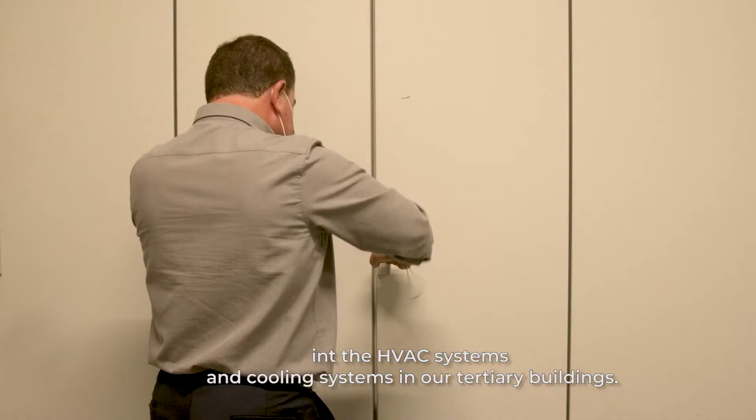One of the use cases regards the provision of flexibility to the grid operator, taking advantage of the existing flexibility in the HVAC and cooling systems in our tertiary buildings. We'll also test innovative EV charging strategies as part of our convenience services, responding to the needs of our clients in terms of electric mobility.

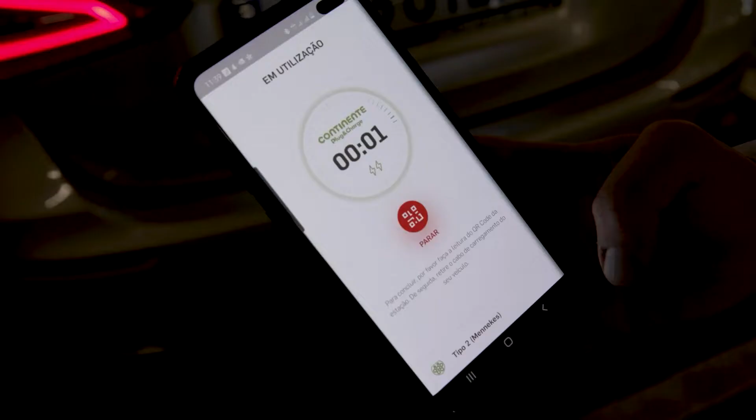We will also enhance the integration of PV solutions, making sure that our stores are increasingly more positive. Projects like InterConnect are essential to break some of the existing technological barriers and demonstrate the solutions and its potential.

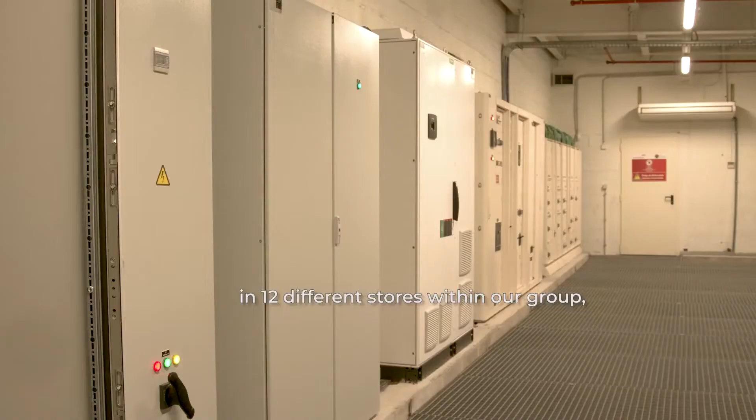Sonae MC, as end user, will test and validate the technologies being developed in 12 different stores within our group, where we are deploying them to support our commercial pilots. Based on the results, Sonae MC could replicate these to other Sonae stores or even to other business units within our group to leverage and consolidate our sustainability corporate strategy as well as the decarbonization of the energy sector.

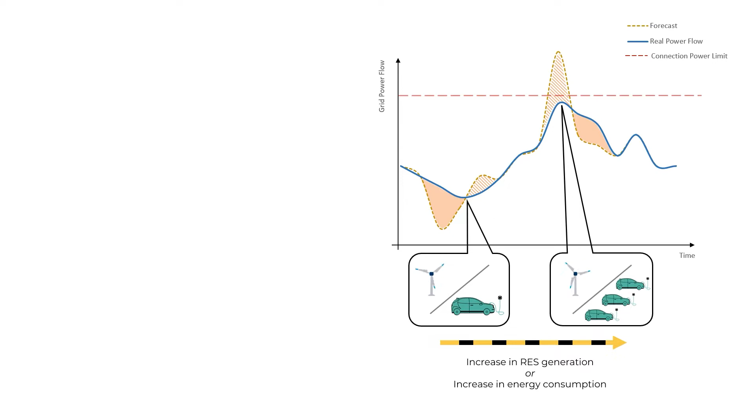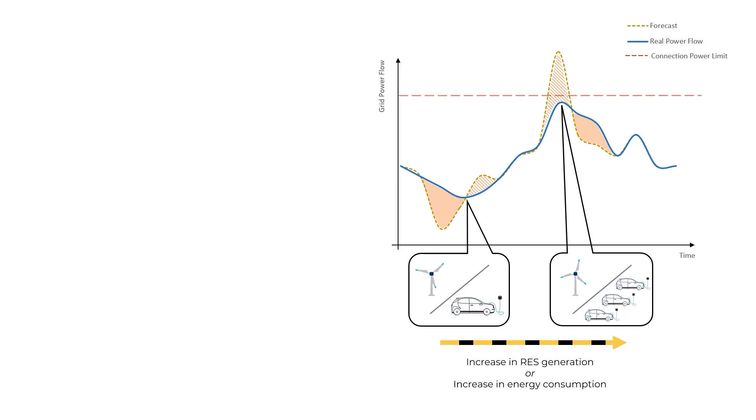The continuous adoption of load-intensive distributed resources such as electrical vehicles or heat pumps, and renewable energy sources such as PV or wind, is increasing the pressure on the electricity grid by introducing extra variability and uncertainty on both demand and supply sides. So there is a clear need to develop new strategies to prepare for and counteract these problems introduced in the system by the new distributed resources.

This can be accomplished with the activation of the inherent flexibility of certain electrical loads that can provide an increase or decrease in power consumption during a given time interval in the future. This can then be used by DSOs to mitigate potential congestions in the grid through a more active management approach of these flexible resources. In the end, the use of demand-side flexibility can also be much more economically favorable than traditional sources, such as flexible generation, while also allowing the DSO to defer some network investments, improve the integration of distributed generation, and improve the overall power system resiliency.

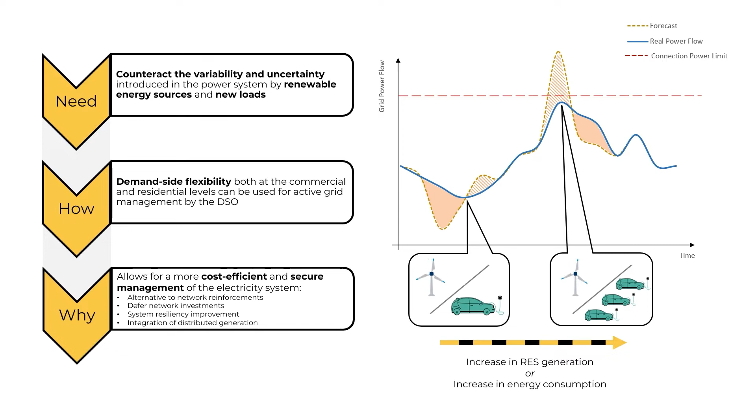Regarding this specific use case and pilot, we'll be exploring demand-side flexibility on the commercial level, more specifically on the supermarket stores' refrigeration systems for the Portuguese company Sonae MC. Considering the substantial thermal mass of these systems, they can also be seen as an energy storage medium that can be used to shift electrical consumption in time and provide the necessary demand response.

The architecture for this use case is composed of the DSO interface from E-REDES, the Portuguese DSO. Then we have the building operating system from Sensinov, which has here the role of flexibility aggregator. Then you have the INESC TEC forecasting service, which provides flexibility forecasts for a given store cold system, meaning the average power consumption increase or decrease over time upon activation of a specific operation mode.

An example would be how much the power decreases over a specific time interval upon activation of the store's energy saving mode. Both of these systems can be accessed remotely by a portfolio manager. Then you have the EcoStruxure Building Operation system from Schneider Electric, which works as a local energy management system for the supermarket store local controllers from Sonae. Both of these systems are limited to local access by a store manager.

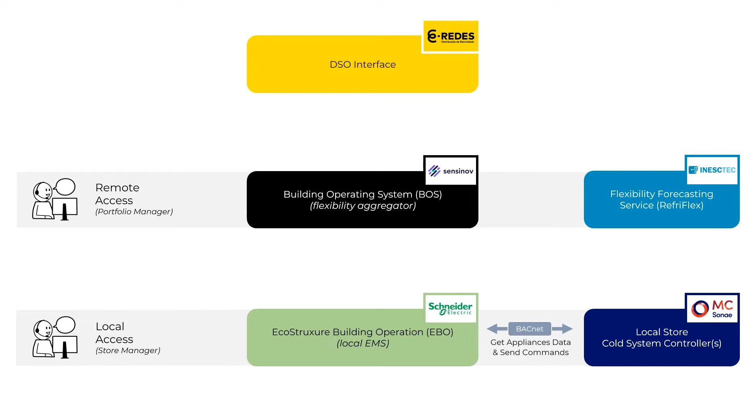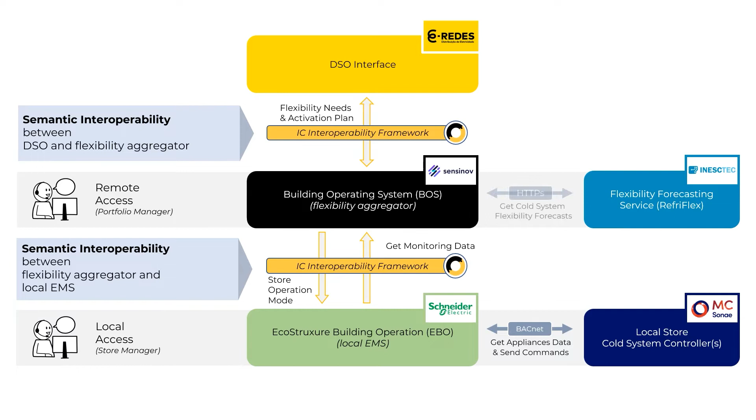Regarding the communications, the energy management system communicates with local store controllers via BACnet to get appliance data and send commands to store controllers. This monitoring data is sent to the flexibility aggregator via the InterConnect semantic interoperability layer, which provides an interface towards a cluster of supermarket stores. This middle layer also allows other third-party data-driven services to later consume supermarket store cold system data. And finally, we have the communication between the DSO and the flexibility aggregator via the interoperability layer, and the request from the flexibility aggregator to the forecasting service to get the needed flexibility forecast for a specific store.

Regarding the sequence of actions to demonstrate: first the DSO identifies an overcurrent problem in a medium voltage line and calculates the flexibility needs to solve it. Then the DSO sends the flexibility needs to Sensinov BOS, the flexibility aggregator, via interoperability framework.

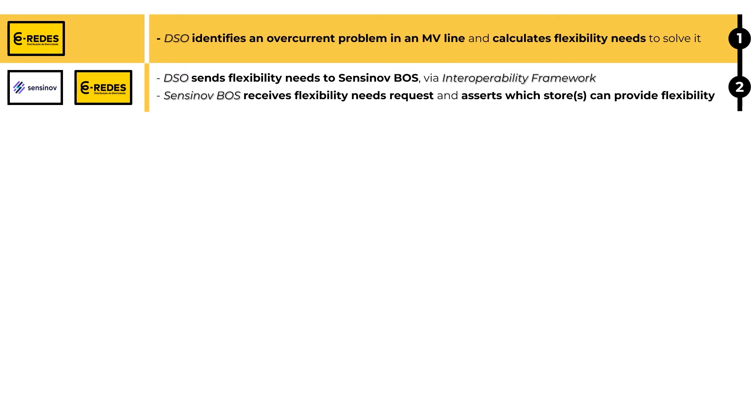Sensinov BOS receives this flexibility needs request and checks in their system which stores can provide flexibility. Then the flexibility aggregator obtains flexibility forecasts from InterConnect Flexibility Forecasting Service and creates the flexibility offers to be sent to the DSO for approval.

These offers are then received by the DSO and inspected, which approves and creates the activation plan based on the flexibility offers provided by this flexibility aggregator, and sends back the approved plan to Sensinov BOS.

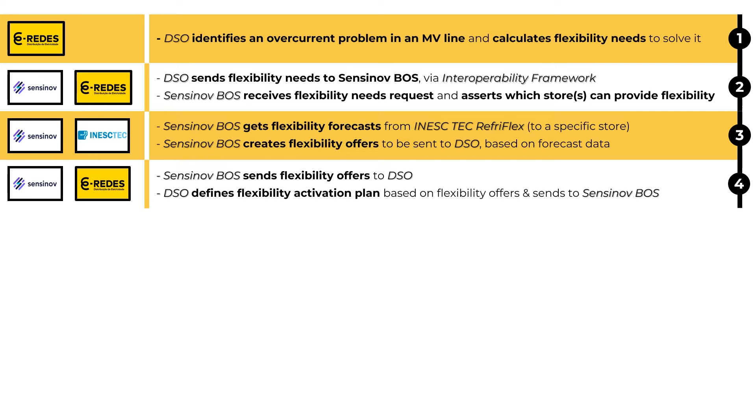Based on the flexibility activation plan, Sensinov creates the operation mode schedule, which is then transmitted to the local energy management system from Schneider via interoperability framework.

And finally, Schneider Local Energy Management System sends the operation mode schedule to SONAE MC local store controllers, which then activate later on the scheduled operation mode.

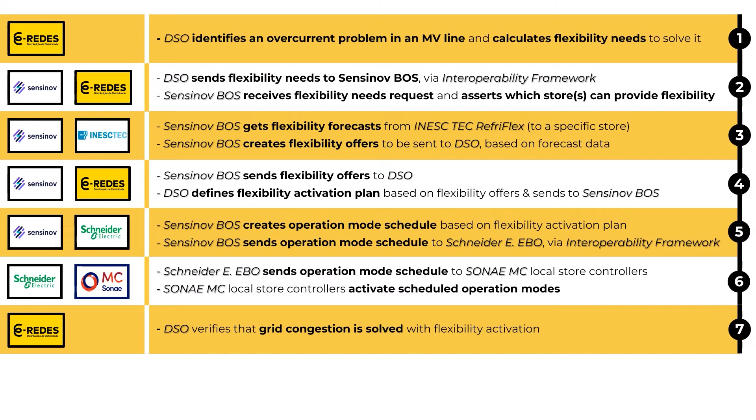In the end, the DSO verifies that the grid congestion is solved with the flexibility activation from this or other stores, and the store refrigeration system returns to the default operation mode schedule.

In this video, you can see an overview from the DSO of a medium voltage line in Ponte de Lima, near the supermarket, where there is a predicted overcurrent from 11 a.m. to 1 p.m.

Then the DSO calculates the flexibility needs required to solve the overcurrent problem, which you can see here below.

When the connector is up and running, all the information collected from Schneider will fuel the Hypervision portal, which features all the 12 commercial pilot sites that will be accessible through the Sites menu.

Clicking on a building will give you an overview of the site, featuring a 3D view of the building and its areas, and information regarding power consumption and latest activities, such as the activation of a specific cold system operation mode.

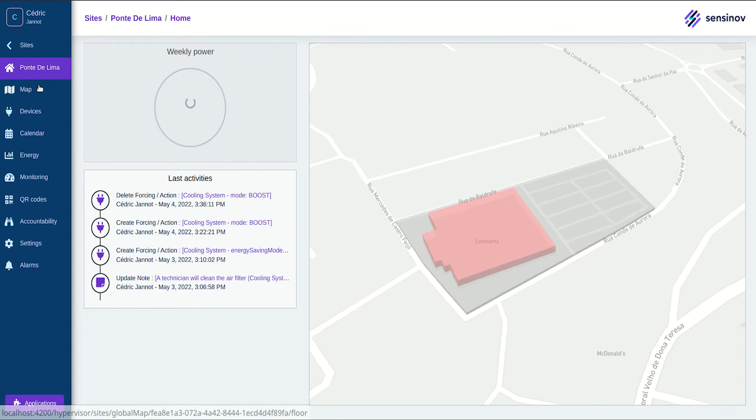Then there is a 2D map allowing users to easily interact with connected devices and get real-time information of their status and latest activity or set points.

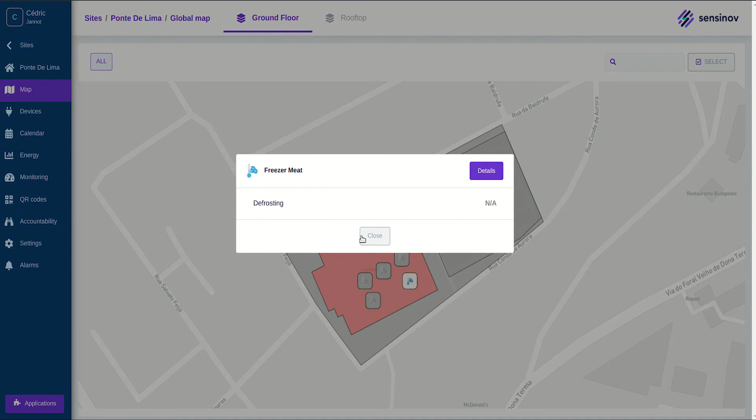The device interface lists all the available devices for the building site, their location within the building, their status, and more. By clicking on a device, you can then access its detailed view page.

This is the main page for the cooling system of this specific store in Ponte De Lima, which is one of the stores that can offer flexibility by adjusting its operation mode to either power saving or boost mode.

In the upper right corner, you can see an alert message mentioning that a new flexibility needs request was performed by the DSO. So we can inspect this recent request or any other requests by clicking on this alert.

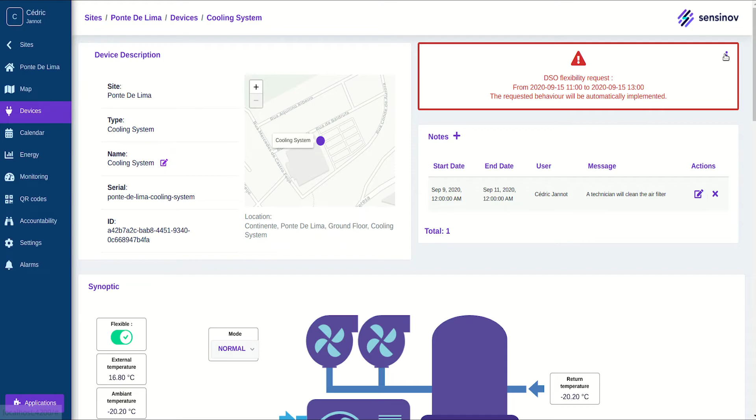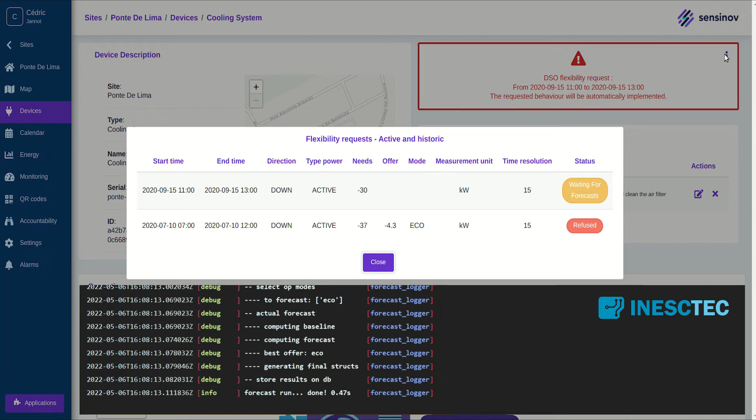Right now, you can see that Sensinov platform is waiting for the InterConnect flexibility forecasts to create the final offer. Upon receiving a new request, Sensinov will request a forecast from InterConnect service, which processes that forecast. You have some logs from InterConnect API below, and then the final offer is created based on that information.

You can see that once the request is complete, the status message changes to waiting for DSO approval.

Sensinov will then send the flexibility offer to the DSO, which creates a final flexibility activation plan in order to activate or not this flexibility.

Then the DSO sends this plan to Sensinov BOS, which then transmits it to Schneider EBO to later be implemented by the store controllers.

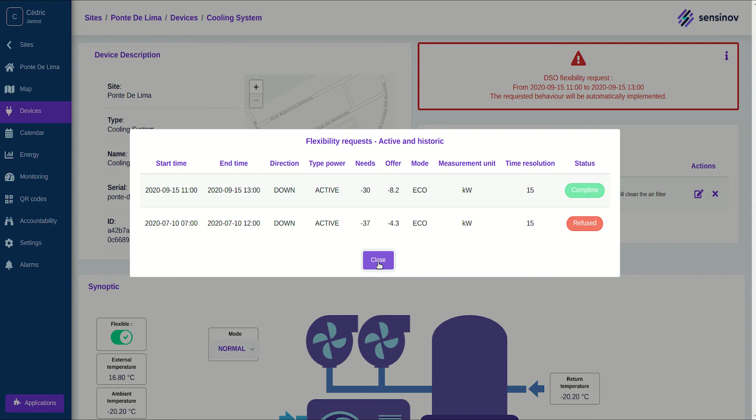Schneider EBO interacts with local store controllers. You can see that right now the store is operating on its default mode.

Then, according to the predefined schedule by Sensinov, it will activate the power savings or eco mode, providing the decrease in power consumption required by the DSO.

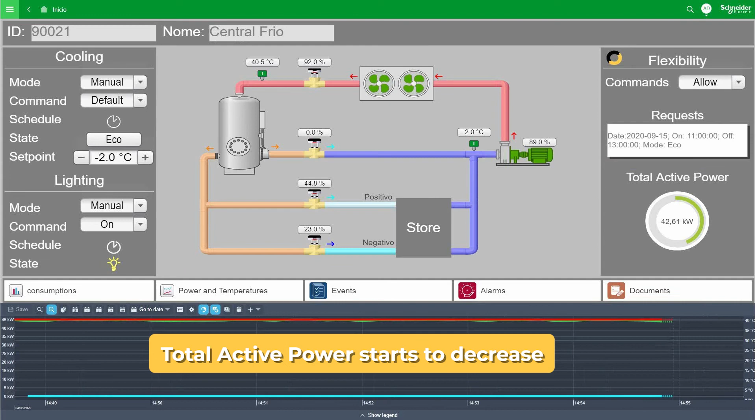You can see that the cold system compressor starts to slow down, the active power consumption decreases, and the temperature of the store refrigeration system starts to increase.

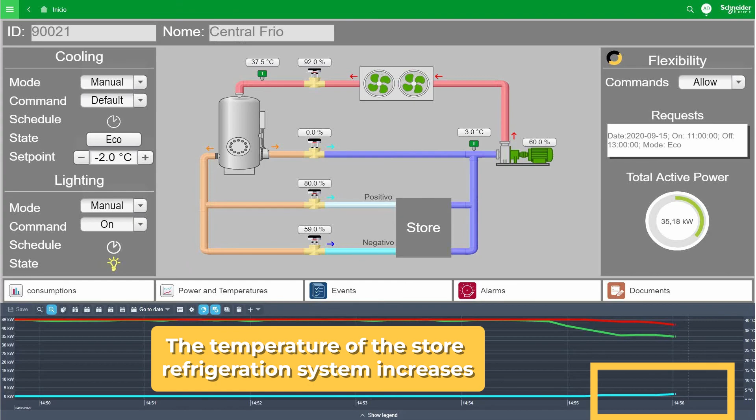Finally, you can see that by exploring this type of demand-side flexibility, the DSO was able to prevent a potential grid overcurrent problem, which was solved with the flexibility activation of this supermarket cold system.